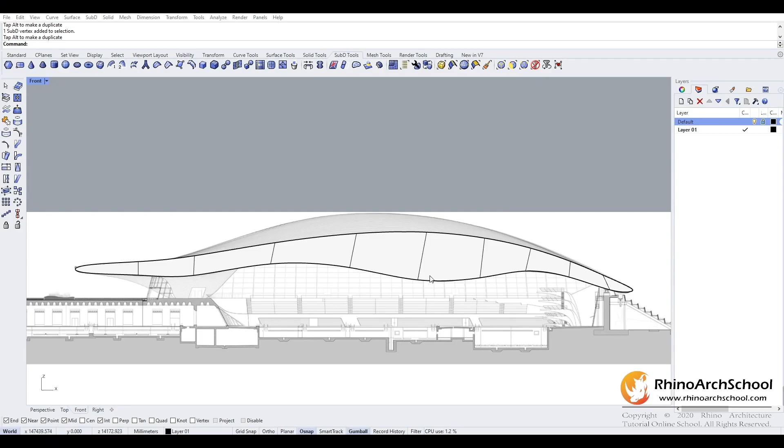So now that we have the overall shape of this side, we'll now switch to our top view. Make sure your plane is set into the center of the plan view. Then, using the gumball extrude, we can now pull it out. Now we have a 3D shape.

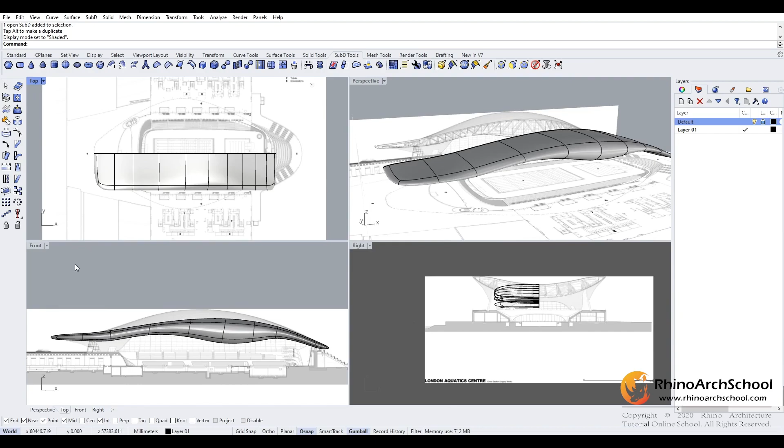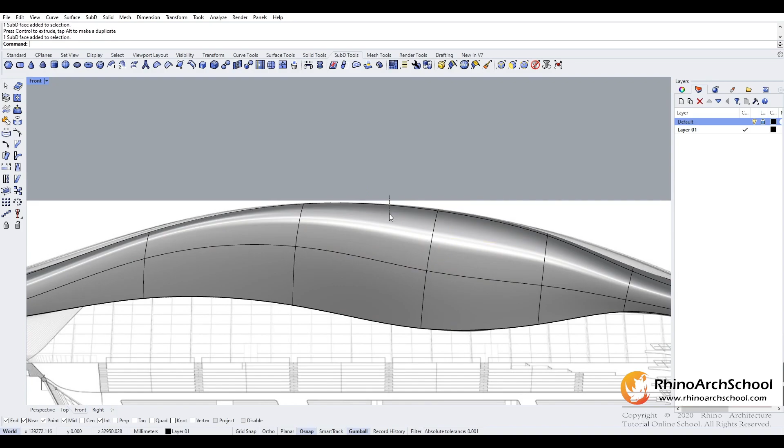See, we can go back into our front view now, and we'll make some adjustments so that this side touches the top of our outline. So you can see that the shape will now follow the overall curve.

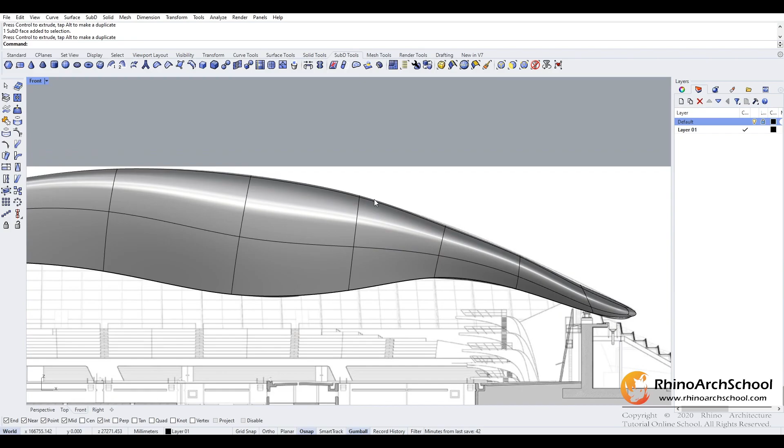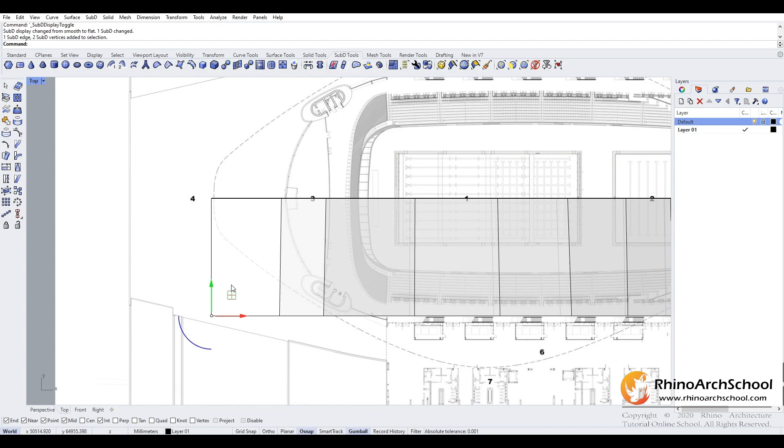Now we'll go back into our top view. We'll set it to ghosted. We'll switch between our flat view and curved view using tab. And we'll bring each point so that the shape follows this dotted line, this dashed line.

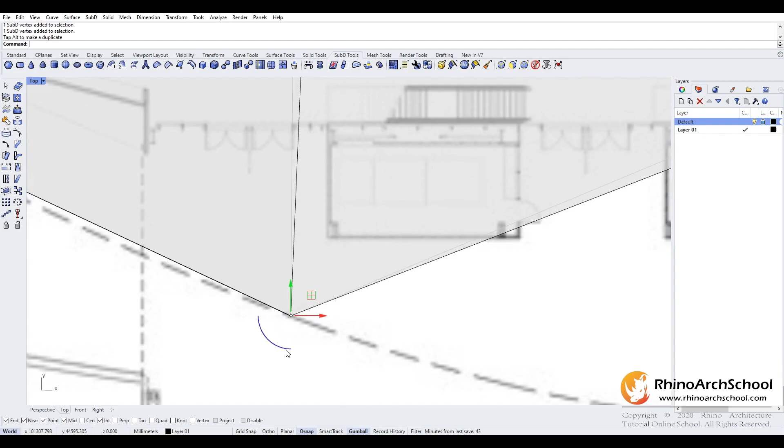You see, you might get a point where you can see the bottom and the top together. To make this more simple, if you see this, just use Control-Shift to select one point and bring it parallel to the lower point. This just makes it easier to look at and to get accurate shape.

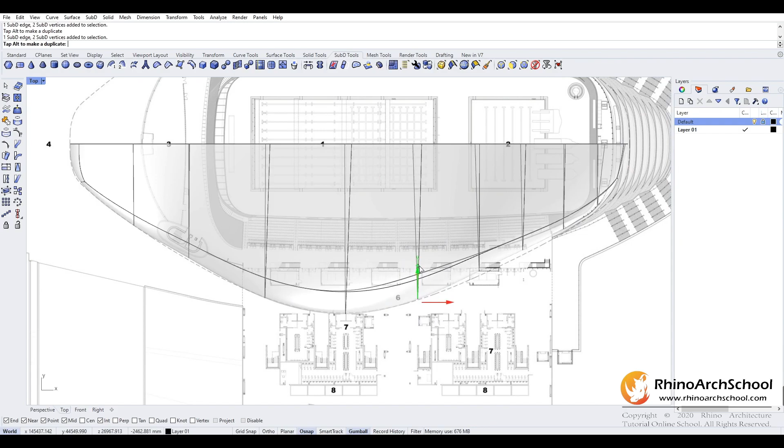So you can see switching between the flat view and the curved view really helps.